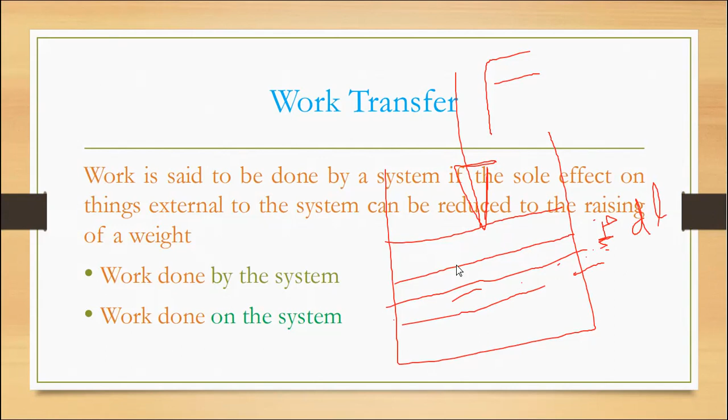So what is the system here? What is the system I have taken? Piston cylinder arrangement, correct? Yes ma'am. Okay, I can show here in the other slide, so this is a system.

Work is done by the system or work can be done on the system. Suppose you have punched your friend very badly in a fighting, then you can say work is done by you. Otherwise, your friend has punched you, reverse - so that means work is done on the system, work is done on you.

So when will you feel happy - when you punched your friend or when your friend punched you? In which case will you feel happy? When we punch, madam. Right, when you punch your friend, then you will feel happy, correct? Then you can call it as work is positive.

When you are punching your friend, you are positive, that means you are happy. When your friend is punching you, that is negative, then you are feeling bad, you are feeling sad, then that is negative. After that you will punch again, but that is another case - here we are talking about only you are punching or your friend is punching, so that is our criteria. So you as a system, you are the person who is punching the other person, so this is the system.

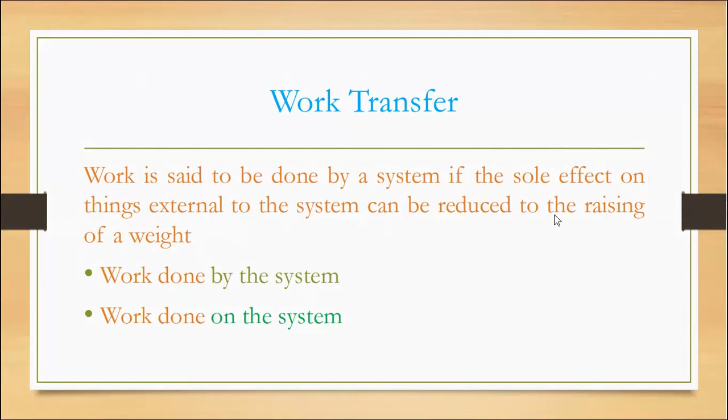Yes ma'am, okay so this is simply the definition given in the book. You just see, work is said to be done by the system if the sole effect on things external to the system can be reduced to the raising of a weight.

So this is the system I have taken, battery and motor. By switching on this switch here, the fan will be rotating. Suppose I have removed this fan and joined a pulley weight system. By the rotation of this motor, this pulley also rotates. You should arrange the pulley in such a way that the weight should be lifted up by switching on this motor battery arrangement. If you switch on this motor, then the weight should be moved up. In that way, you just arrange the system.

Then you can say work is said to be transferred from the system. You can define the work as the raising of this weight. This is reduced to the raising of the weight. That means work can be defined in the raising of this weight here. If the weight is raised to a certain distance by applying some energy, then work is said to be done by the system. So here, work transfer from a system.

So what is the system here? Battery and motor is the system, and this one is the surroundings. So I have done some work from the system to the surroundings. And this is a punching example.

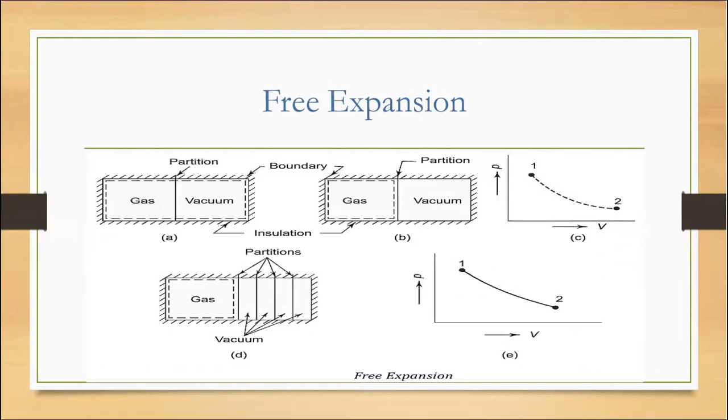Next, what is free expansion? Free expansion means you can take a practical example: you are a very strong person, and in front of you a thin, weak person is there. You are punching and punching and punching. What happens here? He will not resist you, he will keep on taking punches, but he will not react to your punches. Correct, no? Have you experienced this one in your life? I guess everyone has experienced this thing.

When you were a child, you used to get punches from your elder brothers. You will cry and go to your mom saying that he's punching me, so I couldn't confront him. So you have to come there, you are bigger than him, you can punch him more than he punched me. So that was the scenario, right?

So what is this? This is the chota bacha, the small guy, and he is the big guy. This small guy cannot resist this big guy. So this big guy is a gas, and this is a partition. After removing the partition, the punching criteria will be happening, so here the fighting will happen. But the fighting is only from one side - the gas is expanding to occupy this entire volume.

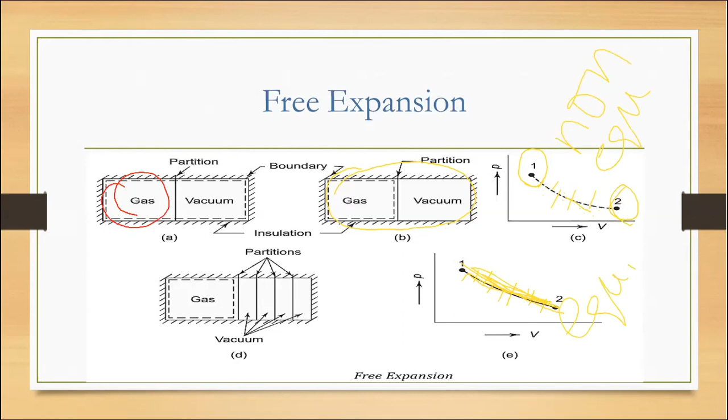So this you can call a free expansion. Free expansion means there is no work. My question is, why is there no work here? The gas is expanding, correct? The work has to be there, but still we say there is no work. This is the last point; I will end here. But before that, you have to say why there is no work in the free expansion process.

Zero opposing force, madam. Right, exactly correct. Who said that? Shanmukh, ma'am. Correct. Because vacuum does not resist with any force. There is no resistance force. So even if the process has taken place, there is no resistance force, so work is zero. This is an example of zero work transfer. Work done against the vacuum is always zero.

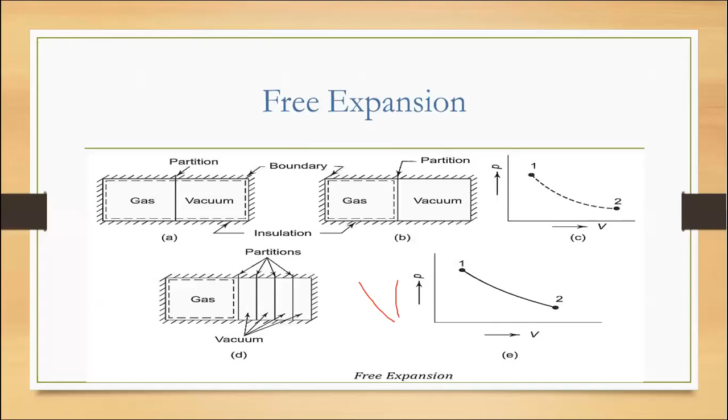So what is the work transfer in free expansion? Is it zero, positive or negative? Work transfer in free expansion, what is that value? Zero. Right. The work transfer in free expansion is a big zero. Just remember, work transfer in a free expansion is zero.